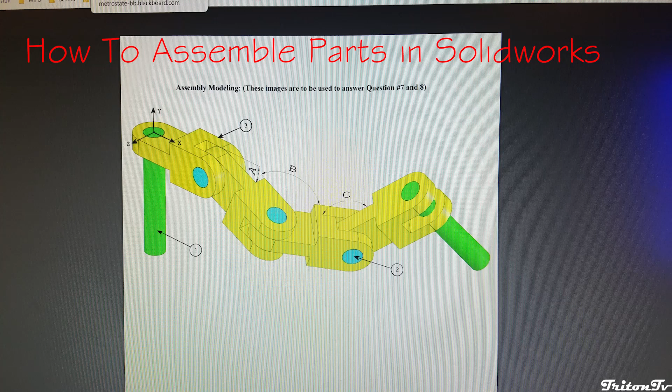Alrighty, here's a really quick video. I'm going to do a little tutorial on how to mate these chain link parts.

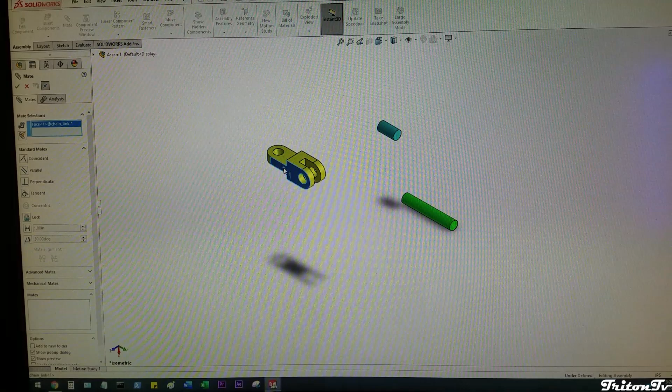In order to be able to move a part around in 3D space, it needs to be floating. If you click on a part and right click on it, you'll see it'll say fix or float. And if they're all set to float, you can move them around in 3D space.

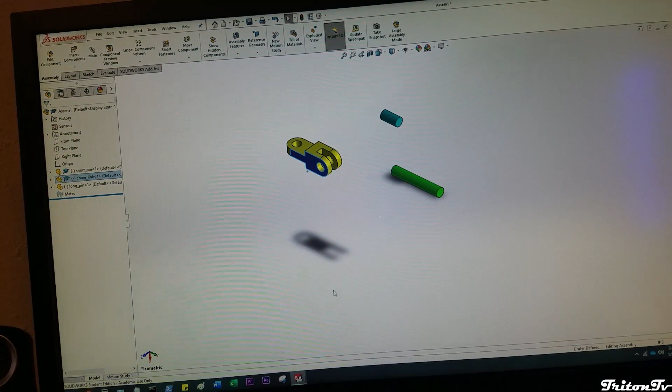So if I want to start the link, here's how the link looks. I'm going to go ahead and just assume some angles here since I don't see any angles. I'm going to assume that's 15 degrees, this is 120 degrees, and that looks like about 60 or 75 degrees. With those assumptions, I have this part placed like this. Looks pretty similar to that, so we'll make this the first part where I start the mating.

I'm going to right click on this and change it to fix, and if I try to left click on it and move it, it won't move. You see it says the selected component is fixed. That's a good way to start your assembly here.

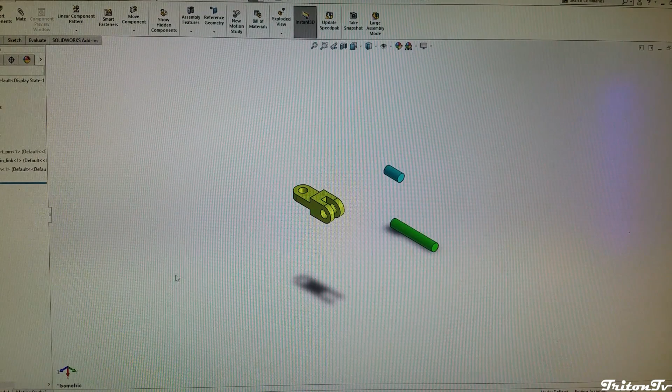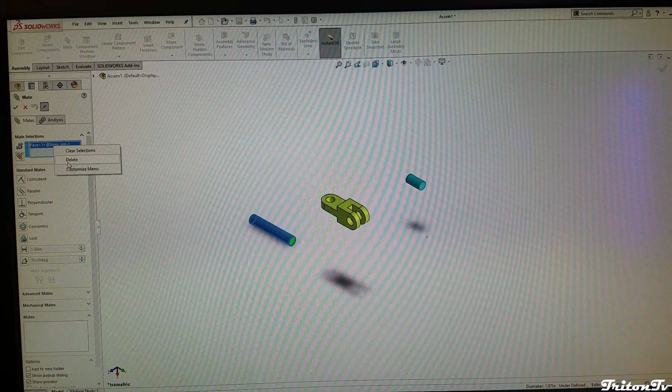So let's go back to the drawing, and I want to start with this long pin here, mated with this hole. There's a couple ways to do that. First I'll click on mate up here at the top, delete this, and mate this face with the inside of this hole, then click OK.

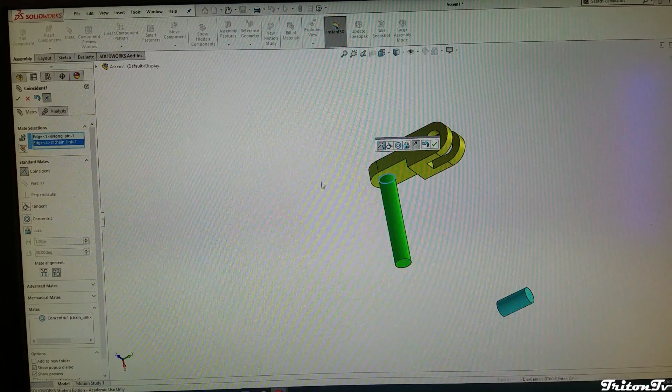I'm going to do another mate. I'll mate this with this outer ring here. As you can see, it moved the part. Oh shoot, actually that's not what I wanted. I'm just kidding. I want to mate that with... here we go, I want to mate that with that face there.

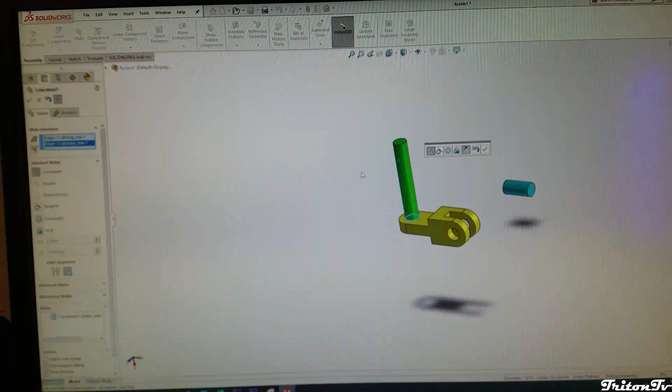Ooh, I don't want that. I'm going to cancel this. I'll show you what kind of mate we have so far. I'm going to rotate around in 3D space here, and as of now I can spin it. It's hard to tell that I'm spinning it, but I am if I move the mouse this way, and if I move up and down, it's concentric, but it's not locked.

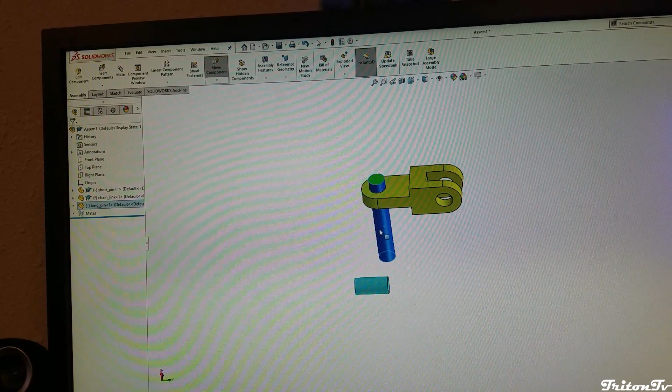So what I want to do is lock this outer ring to that ring, or lock this face to that face, I believe. I'll go up here, click mate, and delete that selection since it always selects whatever you have last selected. So let's try mating this ring to that ring. There we go, push OK.

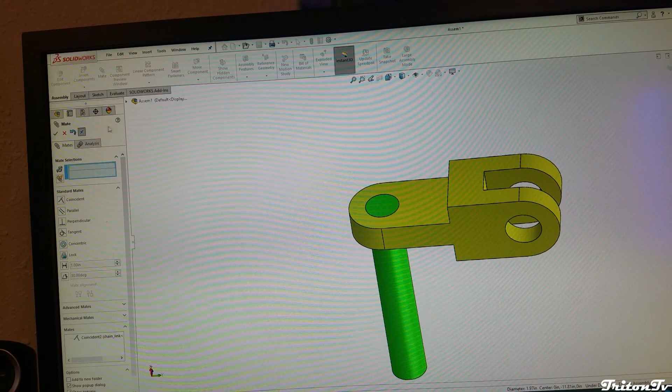I'm going to get out of the mating function, and I can still spin this, but that's okay. So let's go back to the link here. Now I have these two parts mated.

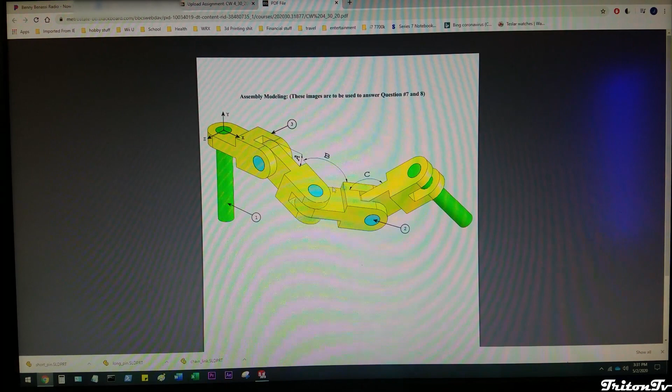I just need to duplicate this kind of link a few more times. I'm going to add in 3 more links, for a total of 3 short pins and 2 long pins. So I need 2 more short pins, 1 more long pin, and 3 more links. I already have 1 of these guys, and I need 3 of those.

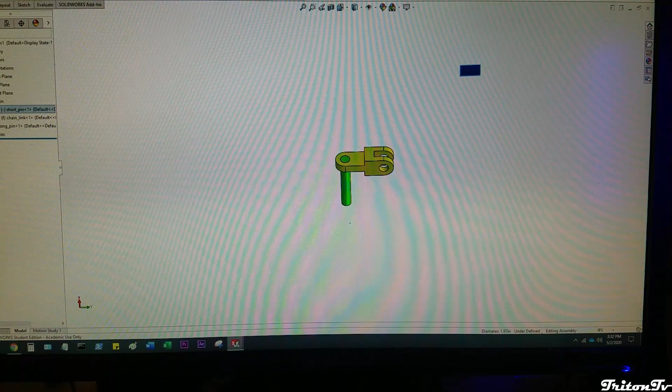I'm going to insert components and browse for the chain link, push OK, and put one more there. Insert components again - it's weird, why does it not keep saying this - chain link, push OK there.

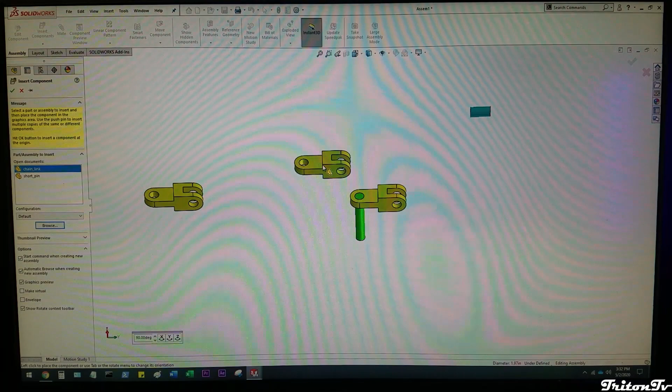So that's 3 links. How many links did I need? 1, 2, 3, 4 - let's get 1 more of those guys. Insert components, browse, chain link. So now I've got 4 of those guys.

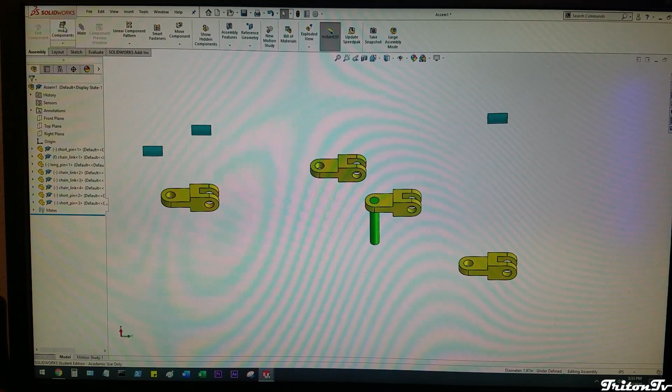So I'm going to need 3 little pins. I only have 1, and 2 long pins. So let's get 2 more of these guys - we've got 2 more of those. Insert components, browse, long pin.

There we go, so I believe I have all of the components. I'm going to go ahead and save this. Save as.

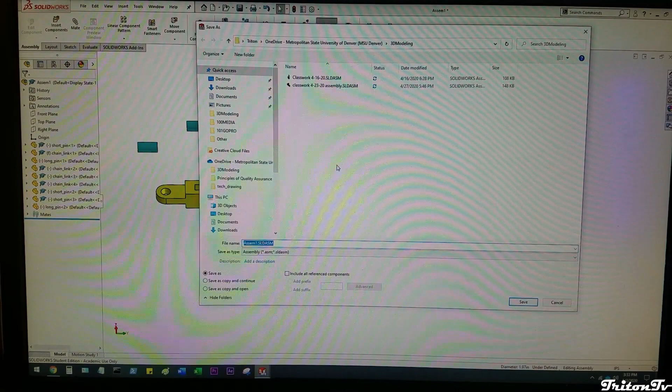I'm going to put the camera down for a sec and save the file. So now what I'm going to do is move some of these out of the way, just kind of consolidate the pieces here.

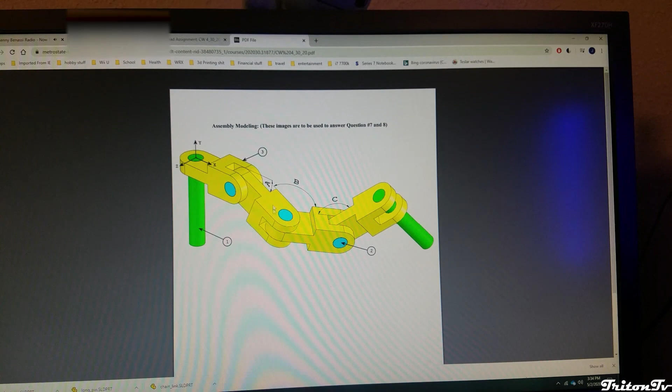Get things kind of where I think I'm gonna need them. Take another peek at the drawing here. Let's go ahead and get this next link mated up here. I think it's gonna be easier to put this link mated with that and then put the pin in. I don't know why, just because I think it's gonna be easier that way. So let's try that out.

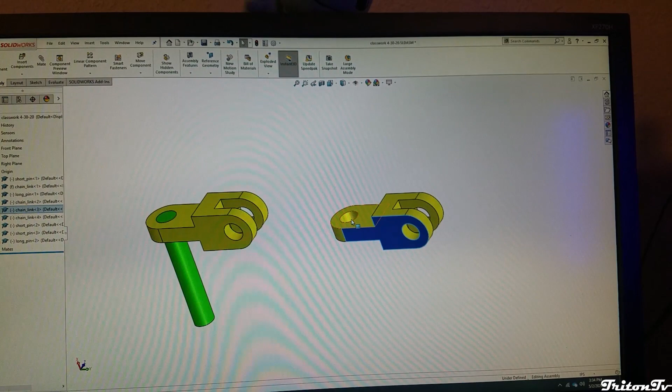So let's go ahead and take this guy here. You can kind of place it where you want it, and let's zoom in here. So I want to mate, there's a couple ways to do this. I want to mate this ring with that part of that ring, and then I think that's all I really need actually.

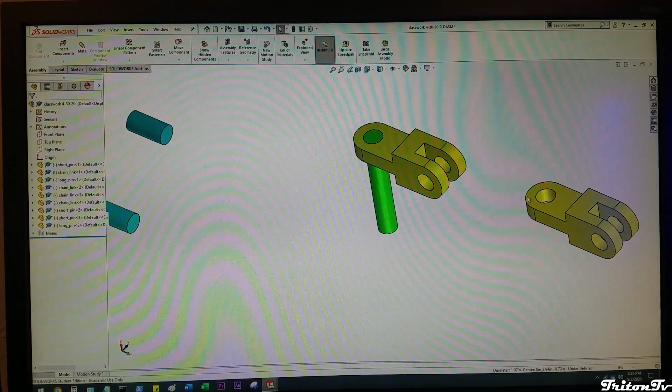Let's try that out. Let's go to the mate tab. Let's go ahead and mate this face with either one. Let's mate it with that one. Oh, I see. No, let's delete that. Let's exit out of that. I wish I could rotate this first, but either way.

Let's actually mate, let's start with the faces first. Let's mate this face to that face. There we go. Let's go ahead and click OK.

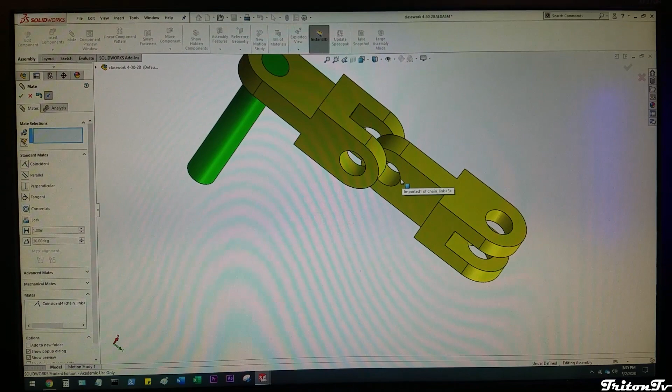And now let's mate one of the diameters to the other inner diameter. So let's go ahead and mate this guy here to that guy there. And I believe that's all we really need. Let's go ahead and check. I should be able to move the link.

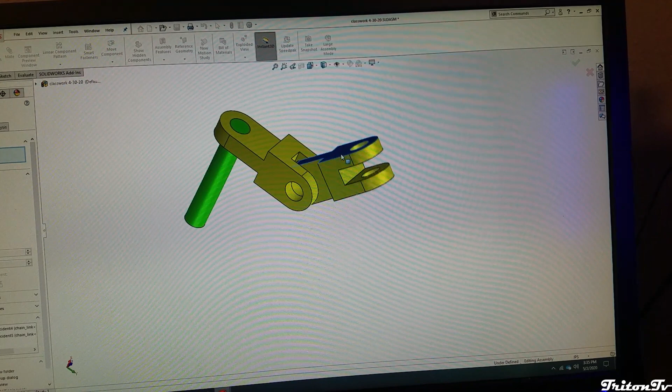Like that, and now it's mated. This is why I think it'd be easier to do the links first. So I went ahead and linked the links, and now let's go ahead and slide one of the pins all the way in there. Let's go ahead and mate this part of that pin to that face.

Haha, it's kind of funny. It always does like the opposite of what I want it to do. So let's go ahead and, oh, it's locked in there. You little piece of crap.

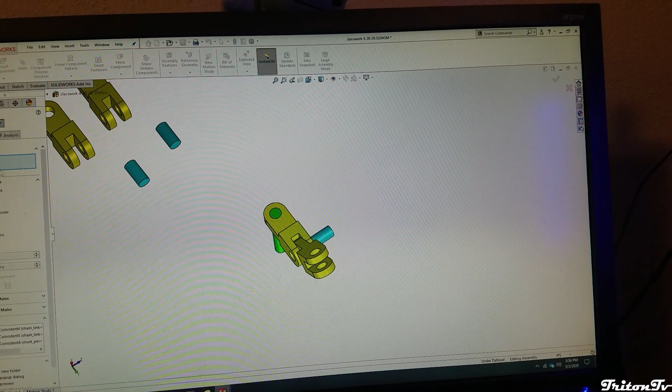Let's see. Let's think about this better here. Let's mate this surface to that surface. There we go. Now let's mate this. Oh, I'll show you what that mate looks like. So now I should be able to slide it in and out, because this outer part of the cylinder is mated with the inner part of this cylinder here.

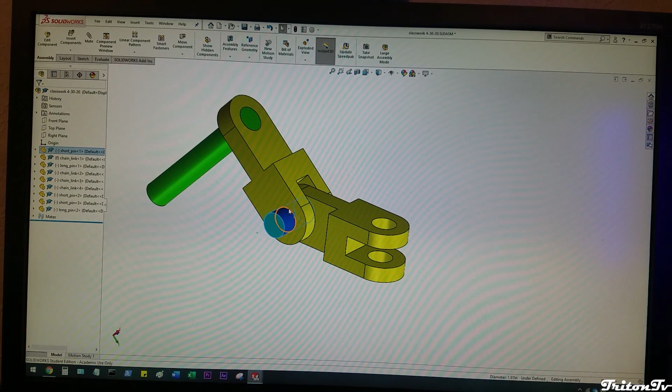So at least it's concentric with that, but now we need to give it another mating of this ring to that part of the ring, either way, just to lock it in place. So let's go ahead and do that. Let's go ahead and mate.

And we're going to, I'm going to delete this just because I don't know what it selected. Let's mate this part of the ring to that part of the ring. Push OK. Boom. Now we're set. Now we have

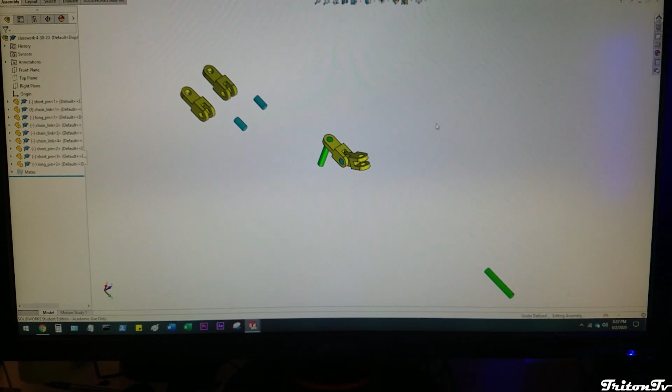This thing linked in there. It can pivot and swivel. I don't think it really matters what angle we set it at, but let's try to make it look somewhat like the picture. Okay, so somewhere down, maybe there. How's that? Looks pretty similar.

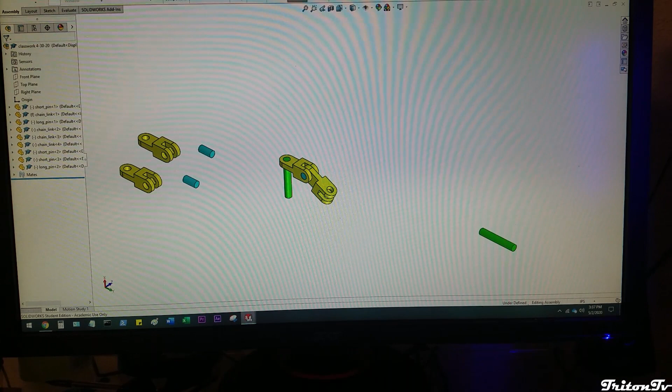So let's just repeat this process here. We're going to go ahead and mate this face to that face. Push OK, just to show you what it looks like. So now, oh, that's kind of cool. It's making the other thing move. So now I can move this up and down in space.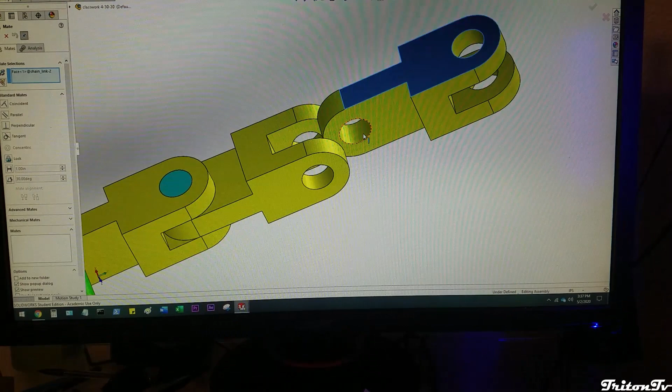We need to lock it to the link just like we did with the other one. So we're going to mate this to that. Hey, I don't know what happened there. Mate that to that. There we go. Push OK. Get out of this function.

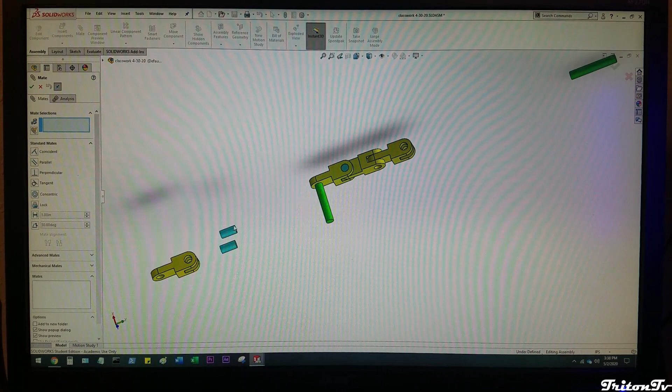Go ahead and just repeat the process here. So we're going to mate this cylinder to that cylinder. That's kind of funny. It actually lined up perfectly, but I should still be able to move it in and out. There we go. It's wanting to act really weird.

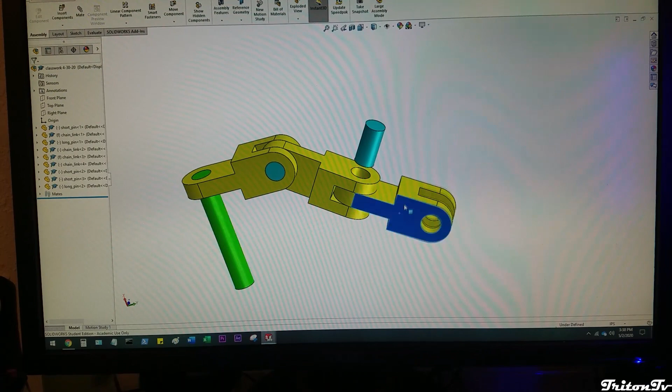And if you're having issues with moving things around, you can always fix these things by right-clicking and fixing it. So maybe I can fix this at whatever angle I want it, right there. So now when you go to move things, you start locking yourself in, but we can make that floating again so this moves.

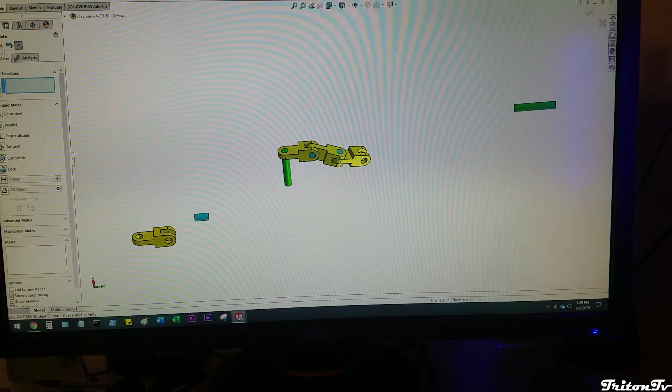So let's go ahead and mate one of these surfaces here. Let's go ahead and mate that to that. Push OK. And just keep repeating the process here. Alrighty, there we go. We have the whole mated assembly.

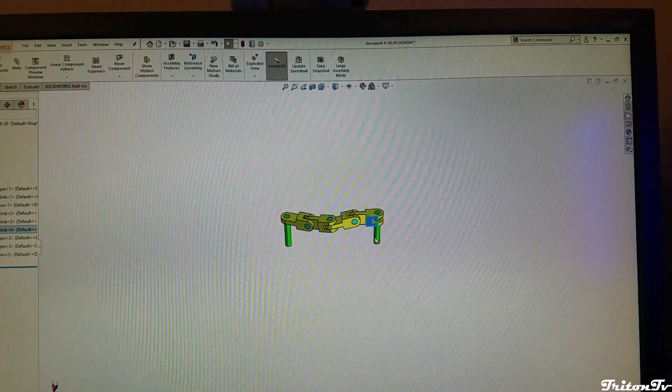So you can see I can move this link here. That's fixed. Whoops, I knew that. Here we go. So I can move this link, I can move this link, and I can move that link. There we go. That's a very simple explanation of how to mate parts.

You can import your files, and when you open the original assembly, let's say you went to File, New, Assembly, you can select multiple files at once to pull in. It just seems a little bit easier sometimes to just insert components one at a time.

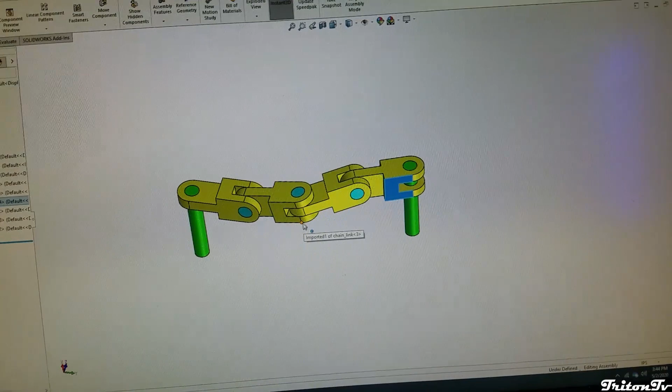So that's a quick video just to help out some students in my class. This is one of our last assignments actually. Really simple. You just pick the faces you want to mate. That last one was wanting to mate the wrong face, so I ended up mating this face with that face, and it worked a lot easier. So you just gotta be careful.

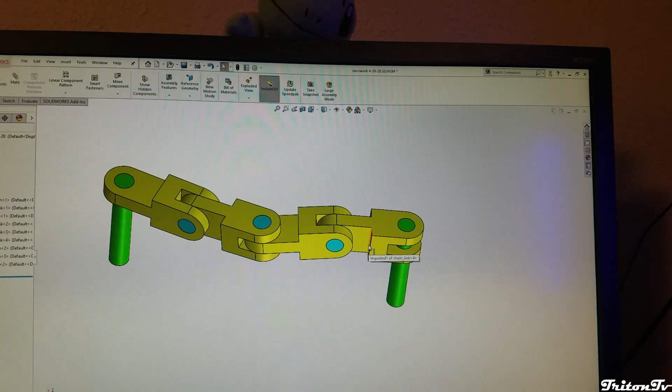It kind of has to do with the orientation that it comes in at. So sometimes you might have to just mess around with mating the opposite face with the opposite face or something like that. There you go. Really quick video tutorial on how to link things in SolidWorks. Thanks for watching.